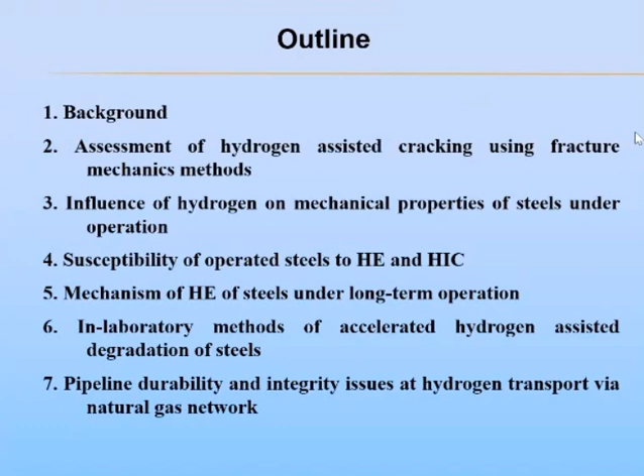After that, I'll consider assessment of hydrogen-assisted cracking using fracture mechanics methods, influence of hydrogen on mechanical properties of steels under operation, susceptibility of operated steels to hydrogen embrittlement and hydrogen-induced cracking, mechanism of hydrogen embrittlement of steels under long-term operation, laboratory methods of accelerated hydrogen-assisted degradation of steels, and finally, pipeline durability and integrity issues at hydrogen transport via natural gas network.

The research questions of the lecture are focused on understanding what hydrogen does when it goes into material, how hydrogen induces damage in steel, and why hydrogen influences the worsening of properties so much.

Hydrogen penetrates the structure of steel and has been responsible for many catastrophes. We know hydrogen goes into material and causes failures, but how it does it, how it induces damage, and how it affects the properties of steel so much are still open questions in science.

It's really difficult to measure individual atoms of hydrogen in steel because it's very light, very small, moves a lot, and hydrogen is highly abundant in the universe. Direct observation of hydrogen in material is very challenging.

Hydrogen in metals has attracted interest from scientists for many decades. Most of the interesting properties are related to the small size of hydrogen, its interstitial diffusion accompanied by quantum mechanics, and the extraordinary high mobility of hydrogen atoms in materials.

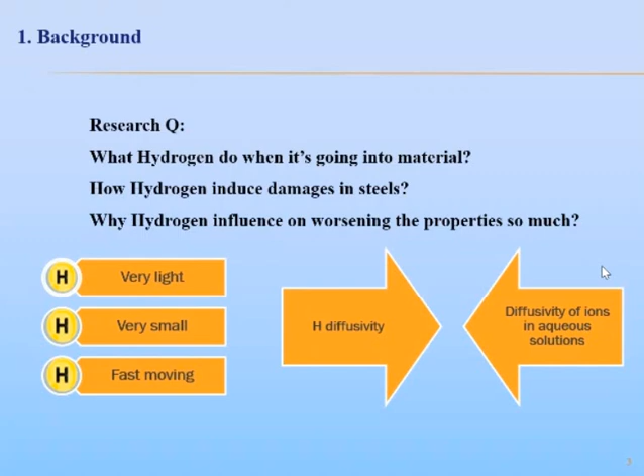Hydrogen-metal interactions can occur at high or low temperature, depending on whether it's below 200 degrees Celsius. Therefore, hydrogen damage takes place in two different regions: elevated temperatures, and temperatures at ambient and slightly above.

This lecture will mainly consider low temperature hydrogen-induced damage.

Once entered the metal, atomic hydrogen interacts with the metal structure and may produce damage of various forms, such as hydrogen embrittlement, hydrogen-induced cracking, blistering, delayed fracture, and others. There are also other damage mechanisms induced by hydrogen in metals.

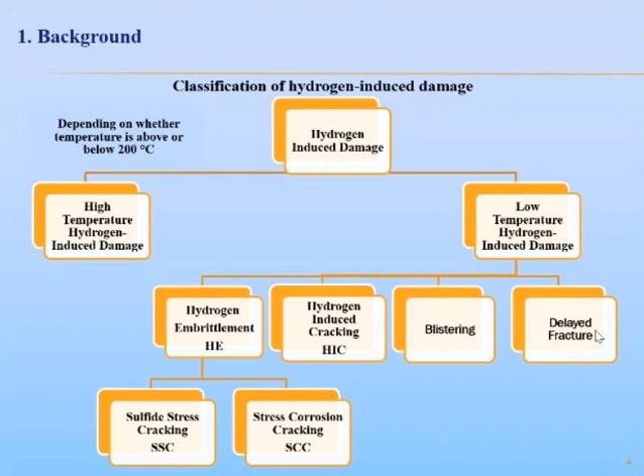If it occurs internally, methane is trapped like hydrogen in hydrogen-induced cracking, creating internal cracks and reducing fracture toughness, fatigue, and creep resistance. This type of damage is often called hydrogen attack.

There are many classifications of hydrogen deterioration, and the most general ones divide embrittlement into two groups: internal and external.

The first relates to embrittlement caused by hydrogen contained in the metal matrix as a result of the manufacturing process. The second is caused by exposure to hydrogen, which inserts inside the metal and modifies the mechanical properties.

Hydrogen can be available in the metal from various sources, including electrochemical reduction of hydrogen, water, carbon dioxide, hydrogen sulfide, and other ions. Here you can see simplified electrochemical reactions for this hydrogen evolution.

In the first stage, the formed hydrogen atom is adsorbed, and it either combines to form hydrogen gas or becomes absorbed into the steel. Here are also presented the most common types of hydrogen sulfide corrosion related to hydrogen damage.

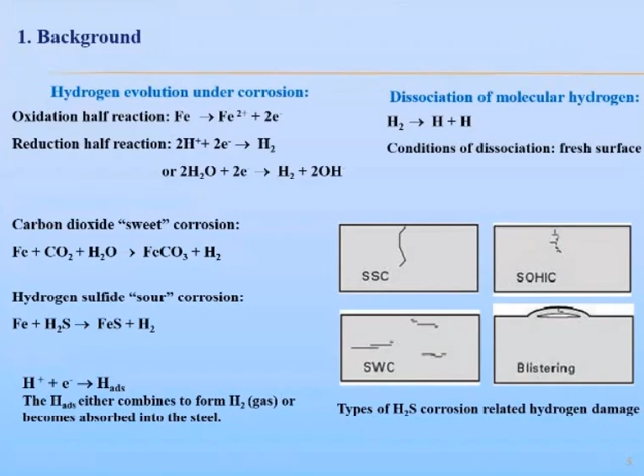Hydrogen can be trapped at various types of lattice defects in steels. Here you can see a nice illustration by Koyama and others showing different hydrogen trapping sites in steels, such as vacancies, certain solutes, grain boundaries, phase interfaces, triple points, precipitates, and others.

The main challenge in identifying the governing mechanism behind hydrogen embrittlement lies in mapping hydrogen trapping and kinetics with microstructural sensitivity.

Microstructure-specific hydrogen mapping is the most important challenge on the way to a better understanding of the underlying hydrogen mechanisms. The presence of hydrogen is challenging to map due to its low mass, huge embrittling effect already at low concentrations, and high diffusivity in the presence of compositional, thermal, and mechanical gradients.

For instance, the average concentration of hydrogen in steels is within the range from 0.1 to 100 ppm. Moreover, hydrogen is diffusible even at room temperature, and this effect is further enhanced in the presence of stress localization.

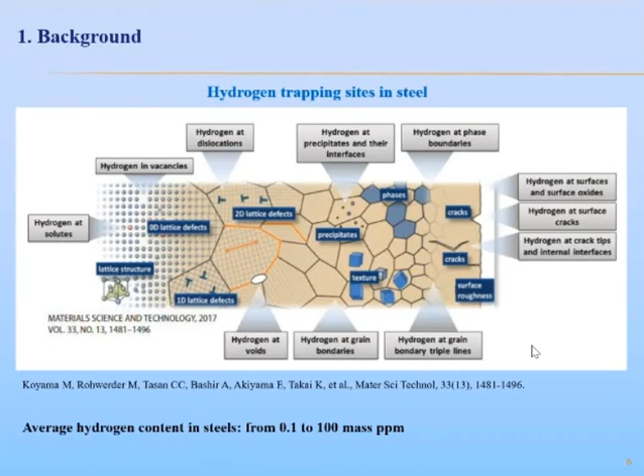There are four requirements for failure due to hydrogen embrittlement: microstructure feature, mechanical properties, exposure to an environment that contains hydrogen or is hydrogenating, the presence of tensile stress on the component, and a temperature range that supports hydrogen transport in steel, which is between -50 to 150 degrees Celsius.

It's worth noting that while cracking mechanisms are similar, the rate controlling processes are very different. A combination of the main mechanisms that occur under hydrogen embrittlement are hydrogen enhanced decohesion and adsorption induced dislocation emission.

Note that high strength steels with tensile stress greater than 1000 megapascal are the alloys most susceptible to hydrogen embrittlement. For a certain hydrogen content, in general steels appear more susceptible as strength resistance increases, and the tendency to embrittlement increases as strain increases. Hydrogen embrittlement decreases as temperature increases, and this behavior prevails at room temperature and disappears above 200 degrees Celsius as dissolved hydrogen escapes out of steel.

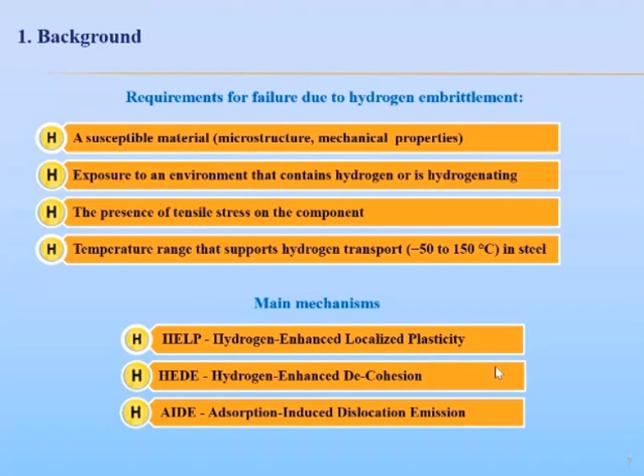The adsorption-induced dislocation emission mechanism is based on hydrogen-induced weakening of interatomic bonds, with crack growth occurring by localized slip. It's assumed that adsorbed hydrogen weakens substrate interatomic bonds and thereby facilitates the emission of dislocations from crack tips. There is also substantial dislocation emission ahead of the crack tip, which results in the formation of voids around particles or at slip band intersections. Such behavior means that crack propagation occurs due to dislocation emission from crack tips, also with a contribution from void formation ahead of the crack tip.

Here you can see how hydrogen is involved in damaging pipeline steels of oil and gas pipelines. Under metal loss from the internal and external surface of the pipe due to electrochemical corrosion, this leads to molecular hydrogen accumulation in certain trapping sites. Such circumstances promote the formation, evolution, and accumulation of micro defects in pipeline steel, or so-called damage accumulation.

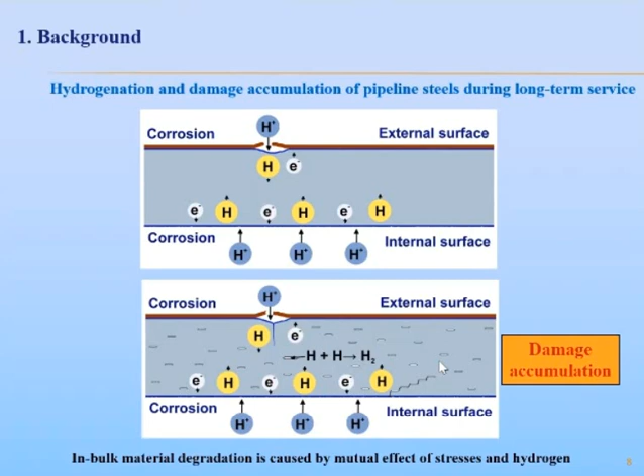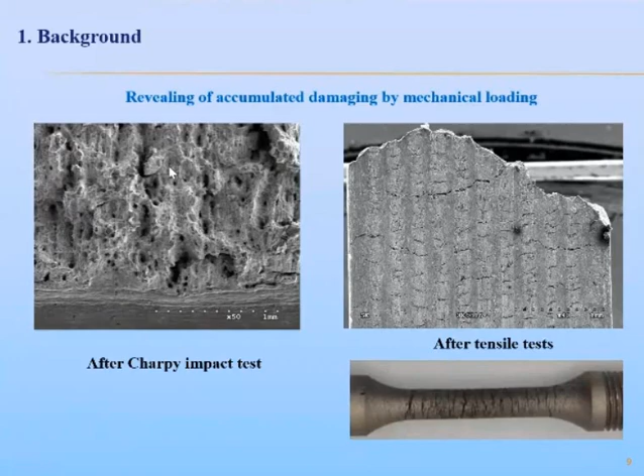Consequently, this leads to deterioration of mechanical properties, especially plasticity and brittle fracture resistance. Therefore, corrosion in oil and gas pipelines is a key issue in safe operations because it accelerates bulk material degradation due to a destructive role of hydrogen, and steel hydrogenation together with working stresses facilitates the development of bulk damage at nano and micro scales. Here you can see some examples of revealing such damage under mechanical loading.

For rolled steels, delamination is a typical feature for degraded metal. Hydrogen facilitates decohesion, so it intensifies microdamaging. It is interesting to look at the mechanism of fracture and energy consumption of fracture in areas between these decohesion elements. If a fracture is ductile with more energy consumption, then fracture occurs due to micro-void coalescence, and the role of hydrogen can consist in formation of high pressure in voids.

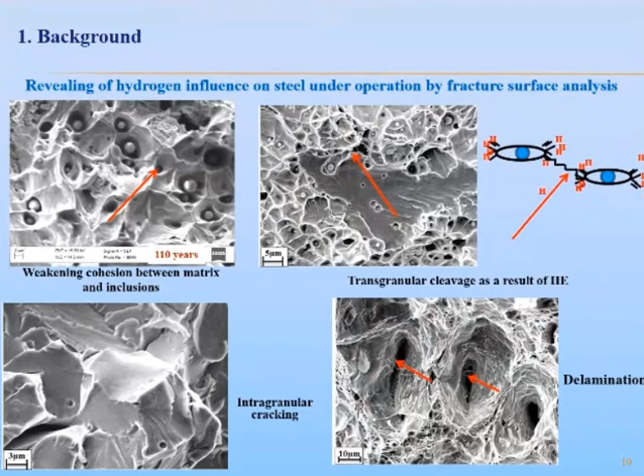Assessment of hydrogen-assisted cracking using fracture mechanics methods. Generally, two types of mechanical loading are used: static and cyclic. For the first one, the crack growth rate dependence on stress intensity factor and a threshold stress intensity factor characterize fracture resistance. In the second one, a corresponding dependence of fatigue crack growth rate on delta K and fatigue threshold delta K-TH, with a constant level of crack growth rate in a wide range of stress intensity factor.

Regarding fatigue crack growth rate, corrosive and hydrogenating environments influence the curves, changing what's typical for tests in air, in these diagrams. They can decrease or increase a fatigue threshold, considering the middle part of the diagram, not influence, or accelerate fatigue crack growth. If the middle part of the curve is similar to a plateau, it means realization of a stress corrosion cracking mechanism in conditions of fatigue.

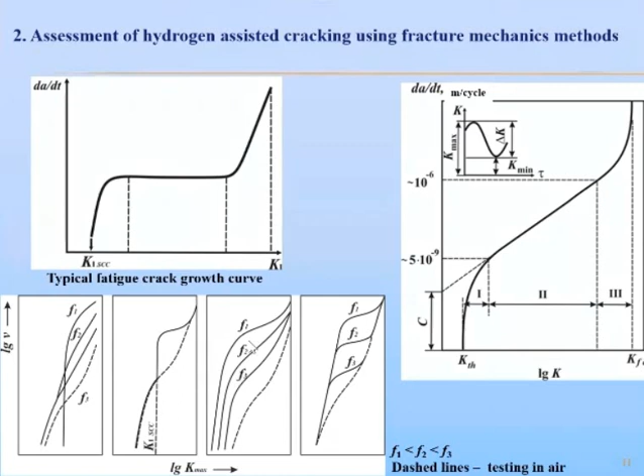Stress corrosion fatigue, and different frequency causes different plateau curves.

Corrosion and hydrogenating environments can change mechanical situation, which usually is not detected by nominal stress intensity factor, a value calculated on the basis of specimen geometry, scheme, level of loading, and crack length. In this case, possible crack branching (micro, macro, intergranular, etc.) and blunting are not taken into account.

But they can have some effect for starting cyclic loading. Another factor that should be taken into account is the crack closure effect, which concerns fatigue crack growth only and consists in prevention of crack closure during part of unloading. The real stress intensity factor range is less than the nominally calculated one. The effective stress intensity factor range is the real mechanical driving force of fatigue crack growth.

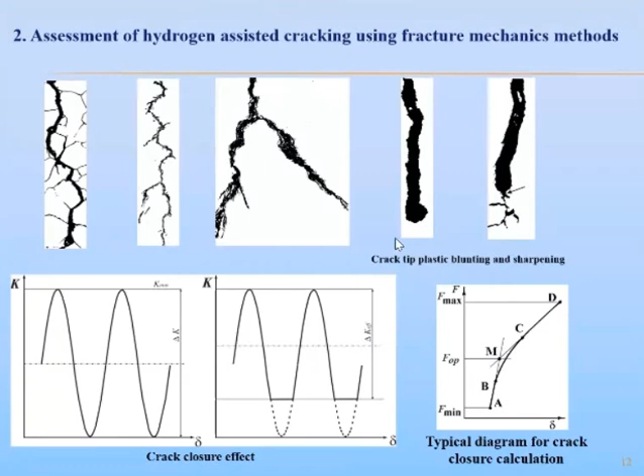Influence of hydrogen on mechanical properties of steels under operation. There are many types of mechanical damage and failure associated with the presence of hydrogen in metal.

Hydrogen in steel may decrease ductility, embrittlement, blistering, and cracking that occurs at lower loads than measured in the absence of hydrogen. Hydrogen accumulates in areas of high stress and may reach a critical concentration, potentially causing fractures and catastrophic damage. Hydrogen atoms readily diffuse in the metal lattice and pose a serious threat to mechanical strength and ductility.

Influence of hydrogen on mechanical properties of steels under operation can be evidenced by mechanical testing of material samples extracted from the operated structure. Here, the presented scheme demonstrates degradation of low carbon and low alloyed pipeline steels. The first stage is deformation aging, and the second is damage accumulation.

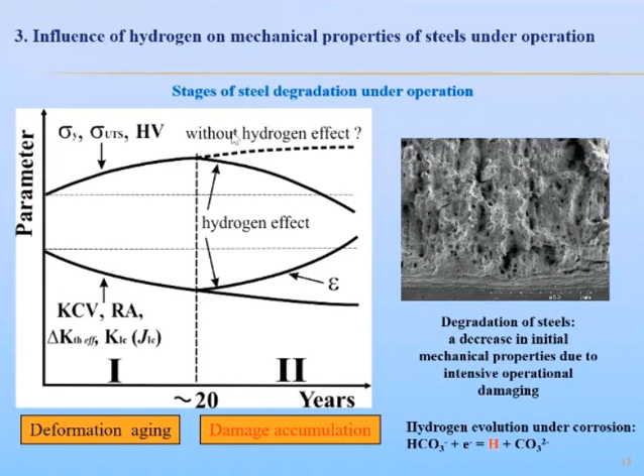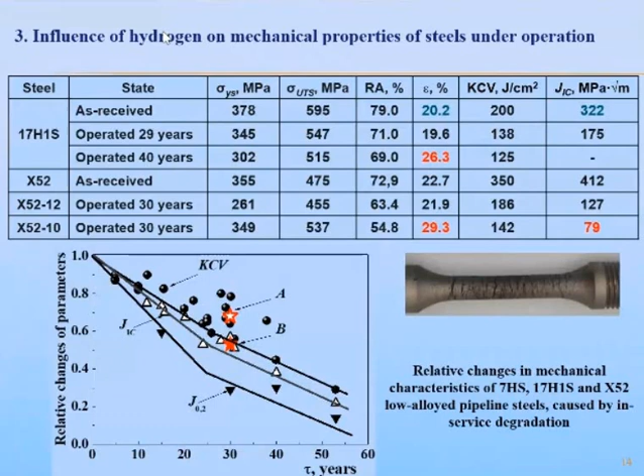Here presented are mechanical properties of pipeline steels in the as-received state and after operation. As we can see, the main peculiarity of operational hydrogen-assisted degradation of steels consists in a decrease of plasticity and brittle fracture resistance. Regarding the characteristics of plasticity, special attention should be paid to assessing elongation.

The issue is the following: operation, due to a long-term mutual effect of hydrogen and working stresses, causes development of microdamaging in steel, and under tension, elongation will combine real plastic deformation with multi-crack opening.

It will at least not diminish elongation, or even increase it. On the slide, you can see that steel operated for 30 years is characterized by the least value of fracture toughness but the highest value of elongation.

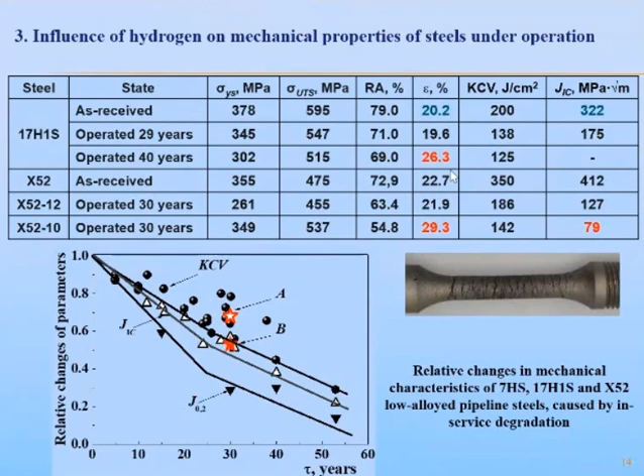Hardness of the damaged steel is also lower than that of the as-received steel. Intensification of the damage in steels can be evidenced by behavior assessed through hydrogen extraction and permeation methods, which provide valuable information for assessment of the degree of in-service dissipated damaging.

The hydrogen permeation method of Devanathan-Stachurski is used, taking into account that hydrogen in a metal is located mainly in defects, which are considered hydrogen traps. Using this method, the lattice and apparent hydrogen diffusion coefficients can be determined, and their ratio is a measure of the trapping efficiency.

Here you can see that the operated steel is distinguished by higher trapping. It means a high level of micro damaging.

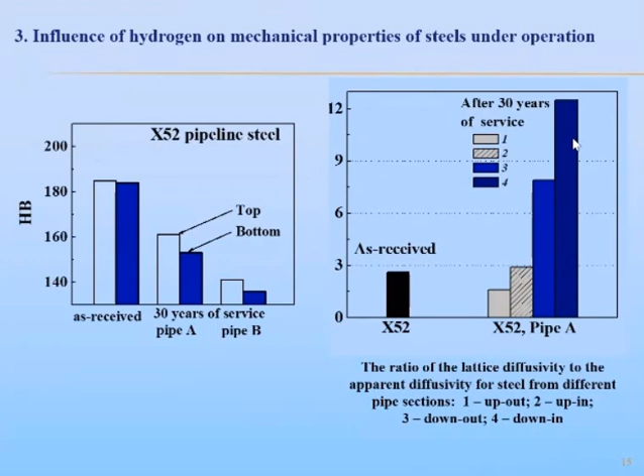Using the hydrogen extraction method, it was found that in the case of steels in the initial state, most hydrogen was dissolved at a low extraction temperature, 200 degrees Celsius, whereas the operated steel is characterized by a higher temperature of desorption, indicating hydrogen trapping by sites with higher energy.

It's important to emphasize that it's not really the hydrogen concentration that causes embrittlement, but rather hydrogen diffusivity through the steel.

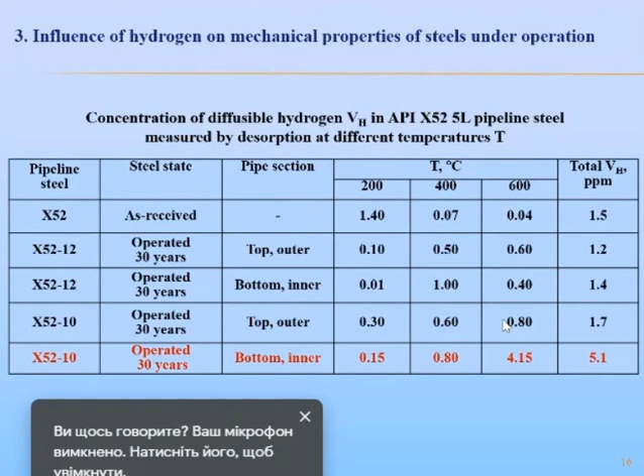As you can see on this slide, a decrease in brittle fracture resistance is in good agreement with hydrogen concentration in the metal. Higher hydrogen concentration corresponds to a lower level of impact toughness.

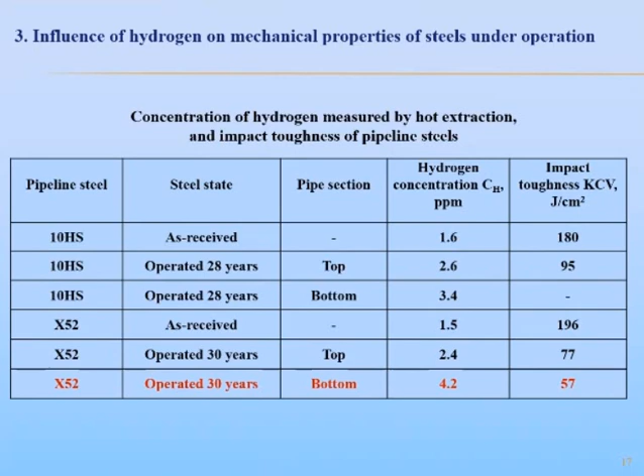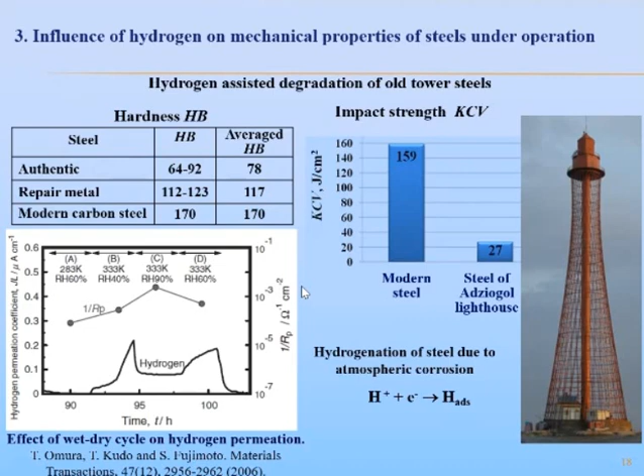Here you can see another example of hydrogen-assisted degradation of carbon steel under operation and dependence of steel degradation degree on the sign of operational cyclic loading. The material under study was low carbon steel obtained from a stacker conveyor boom after 30 years of service. This boom frame of a stacker conveyor was subjected to atmospheric corrosion and operation, and as it was shown, atmospheric corrosion is accompanied by hydrogenation.

So here presented data show relative changes in mechanical properties of the carbon steel in different states. A minor change in strength characteristics of operated steel compared with the reference steel was observed. A reduction in area and elongation at fracture were decreased as a result of a long-term operation. As can be seen from these results, both tensile and compressive cyclic loading and the operation leads to plasticity deterioration.

Here is the result of degradation of brittle fracture resistance of the steel. Thus, at ambient temperature, the impact toughness values of the operated steels were about 30% lower than the reference steel. And the extremely low values of impact toughness were obtained at testing at temperature of minus 40 and minus 20 degrees Celsius for all operated steels. As you can see, the decrease in impact strength of steel due to long-term operation was almost the same for both studied operated steels, irrespective of the sign of operating stress.

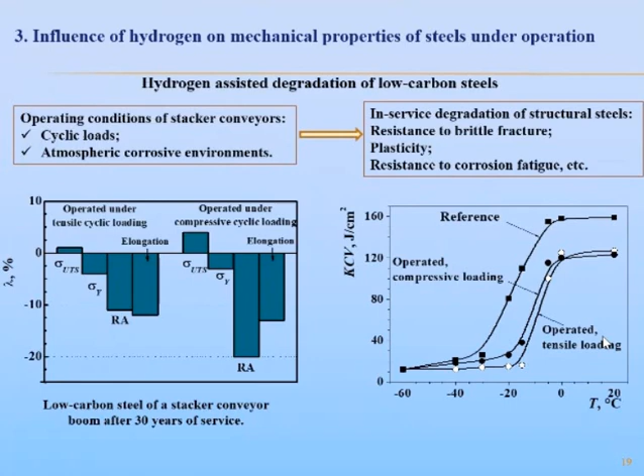On this slide, results on fatigue crack growth propagation in the operated under tensile loading steel and in the as-received and reference steel, in air and in a corrosive environment at different stress ratio. It should be noted that a high plasticity of the study steel and thin thickness of the specimens, limited by angle bar thickness, and high stress ratio significantly limited the stress intensity factor range for which it was possible to obtain fatigue growth values and build the kinetic diagrams.

As can be seen from this data, these values of stress intensity, of minimum thickness of specimens to ensure plane strain state, are in the near threshold region of the fatigue growth curves. Therefore, only the threshold stress intensity factor range can be considered as characteristics of the steel. And the difference in fatigue growth rate revealed for different stress ratio are associated mainly with a decreasing effect of fatigue crack closure effect at increasing stress ratio.

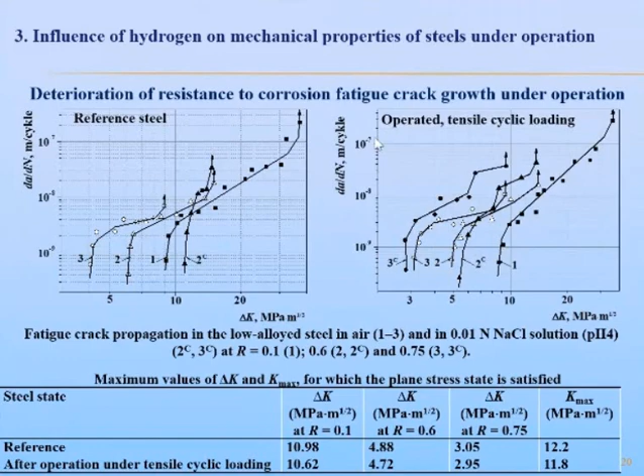Here you can see another example showing deterioration of resistance to corrosion fatigue crack growth under operation. And cathodic polarization of steel in corrosive environment causing its hydrogen charging leads to an increase in fatigue crack growth rate more intensively for operated damaged steel in the medium amplitude region of loading, the Paris region, often with a plateau of rate on the curve. This is due to a combination of mechanisms of fatigue and stress corrosion cracking.

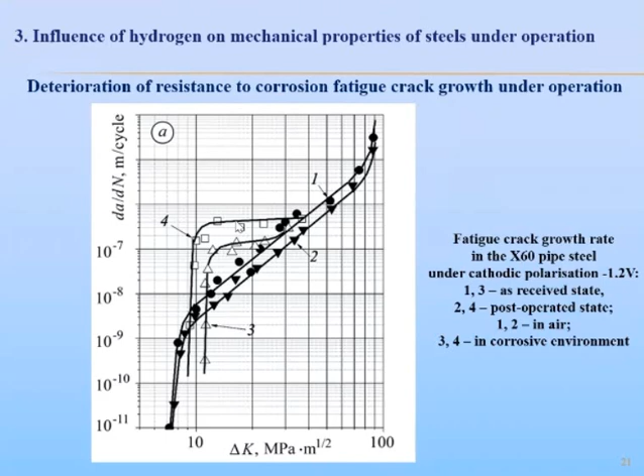It means that fatigue growth is significantly induced by sustained load. And here is demonstrated effect of internal hydrogen on fatigue growth in the operated pipeline steel, when hydrogen diffuses to a prefracture zone through the bulk metal.

Fatigue growth in steels is usually studied under conditions of filling the crack cavity by a hydrogenated environment. However, in this case, to study the effect of internal hydrogen, a special scheme of fatigue testing and hydrogen electrochemical charging has been developed.

As you can see, only the lower part of the specimen was subjected to electrolytical hydrogenation, while at the same time the upper part of the specimen had a growing fatigue crack. The fatigue crack was in air, and hydrogen absorbed by the metal due to electrolytical hydrogenation moves by diffusion to the crack tip and affects crack growth rate.

This figure demonstrates such an effect. We can see acceleration of fatigue growth in the operated pipeline steel caused by internal hydrogen.

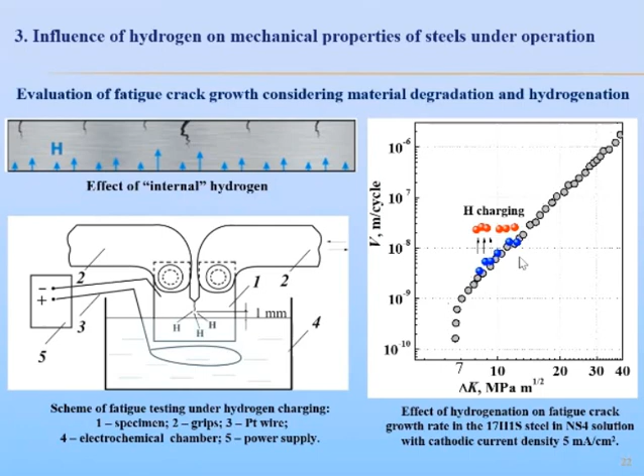Susceptibility of steels to hydrogen embrittlement can be studied by tension testing of specimens in air after hydrogen precharging electrolytically. The plasticity characteristics of steels without and after hydrogenation are compared, and susceptibility to hydrogen embrittlement can be evaluated by the change in plasticity characteristics. The research results demonstrated that both studied steels of casing pipes were sensitive to hydrogen embrittlement.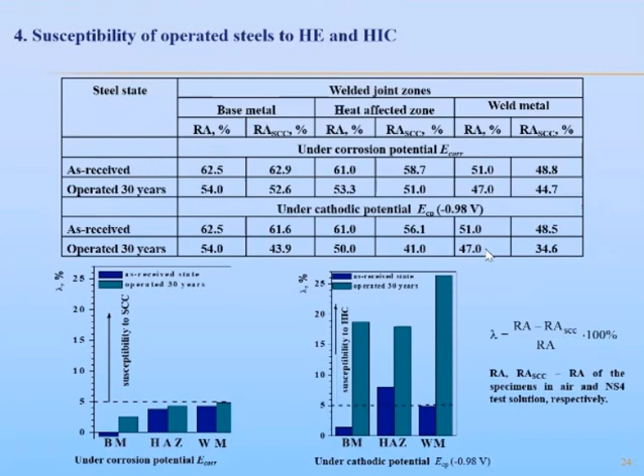In order to assess susceptibility to hydrogen-induced cracking, the electrochemical method of hydrogen permeation can also be used. For this purpose, an electrochemical permeation cell with a cathode and anode is used, and a steel membrane specimen is located between the chambers.

In the cathode chamber, cathodic current is applied to the hydrogen input side of the metal membrane, and it's periodically increased step by step. On the hydrogen output side, hydrogen permeated through the membrane is oxidized, and increasing cathodic current each time leads to an increment of anodic current density in the oxidizing cell.

The layer of the membrane becomes damaged due to combined action of hydrogen and residual stresses induced by intensive hydrogen charging. In such a case, a sharp decline appears on the oxidizing curve of the hydrogen output side of the membrane, and this indicates the trapping of hydrogen by newly formed defects, that is, the development of hydrogen-induced damage.

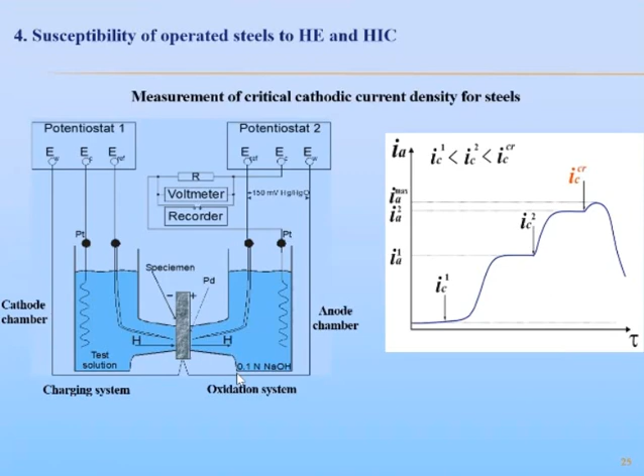Thus, the cathodic current density which corresponds to defect occurrence is considered critical, and it shows the mechanical susceptibility to hydrogen-induced cracking. As can be seen, the initial state in comparison with the operated steel is characterized by a higher level of critical cathodic current, meaning it is more resistant to hydrogen-induced cracking.

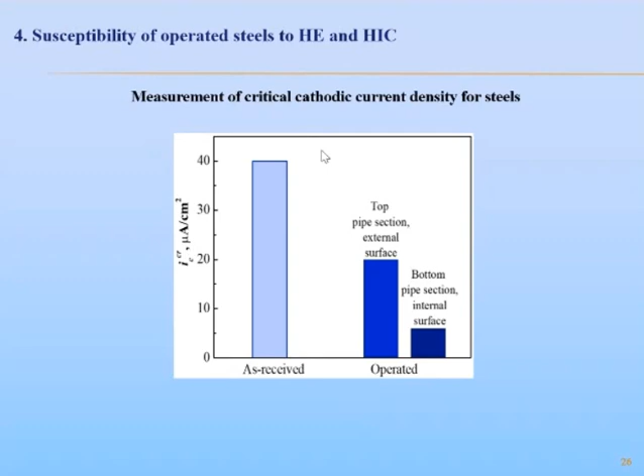Rolled steels are commonly susceptible to delamination cracking, since they are characterized by a banding microstructure, and non-metallic inclusions are also elongated in the rolling direction. Here you can see typical microstructures of rolled pipeline steels. Generally, the lamination is formed along a plane with relatively weaker texture parallel to the rolling plane within the steel due to any factor that leads to anisotropic microstructure, including plastic deformation and so on.

Damage also accumulates in the rolling direction during long-term operation, facilitating cracking along the pipe axis. Hydrogen charging of the metal from inside the pipe due to electrochemical corrosion leads to molecular hydrogen accumulation at certain trapping sites, for instance intergranular defects and the inclusion matrix, creating high pressure in them. Hydrogen accumulated inside the delamination cavity eventually leads to pipeline damage, and as a result of excessive hydrogen pressure, fracture often takes place even in the absence of any external loading.

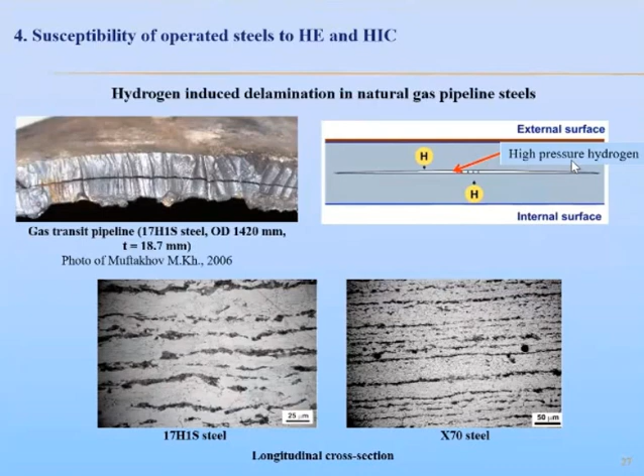A common feature of delamination cracking in pipelines is that fracture propagates in a longitudinal direction, which often results in pipeline fracture. Here you can see extensive delamination of the pipe wall in two natural gas pipe elbows operated for 40 years, revealed by ultrasonic testing of the pipe wall. Such delamination covers a large area in the tension part of the pipe elbows, and in one of them, a crack was also revealed.

Formation of this crack results from the pressure of recombined hydrogen accumulated in the delamination.

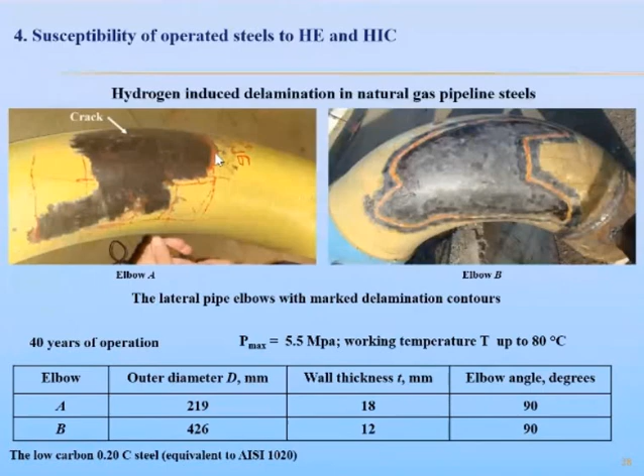And it was confirmed by the fact that the crack growing from the macro defect opened on the outside of the pipe at some distance from the delamination contour.

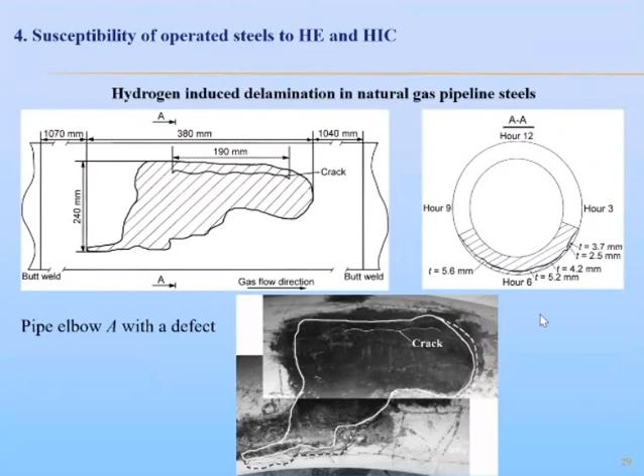Here you can see results of laboratory testing of mechanical properties of this steel, performed using standard smooth cylindrical specimens and also notched specimens in order to estimate mechanical properties.

Axial and cross transversal specimens were tested. The pipe elbow steel was characterized by lower plasticity in comparison with the straight pipe run, regardless of whether the elbow section was tensioned or compressed.

Moreover, the highest decrease in reduction in area values was inherent to the steel of the tensioned pipe elbow section compared to the straight pipe one.

It should be noted that to determine correctly the plasticity characteristics of pipeline steel susceptible to hydrogen-induced cracking, notched specimens with stress concentration in the cross-section location only should be used.

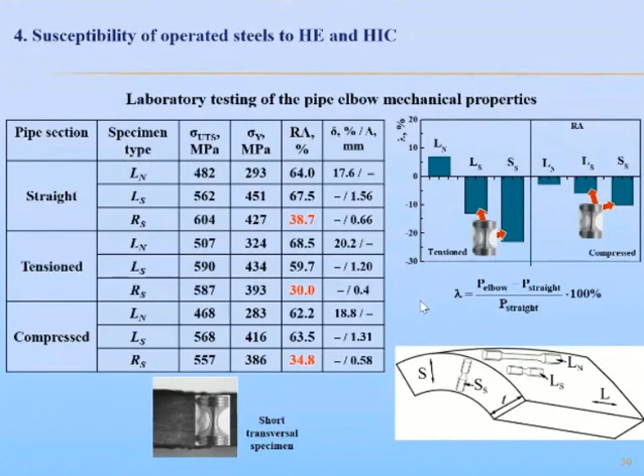Here, presented data show susceptibility of the steel of straight and tensioned pipe sections to hydrogen embrittlement. It's obvious that the steel of the tensioned pipe section was characterized by higher sensitivity to hydrogen embrittlement, especially under testing short transversal specimens, in which a fracture plane is parallel to the most damaged plane.

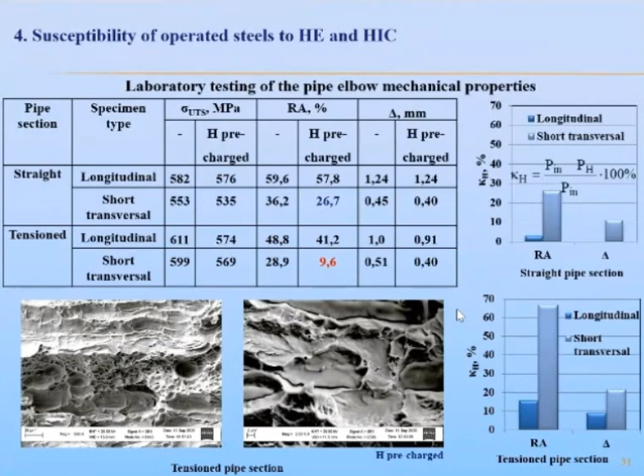The steel of the tensioned pipe section, being the most degraded during operation, was characterized by lower values of fracture toughness, and also very low values of impact toughness were obtained under testing short transversal specimens.

It should also be noted that when longitudinal specimens were tested, a number of delaminations on the fracture surface were observed. Here you can see on my...

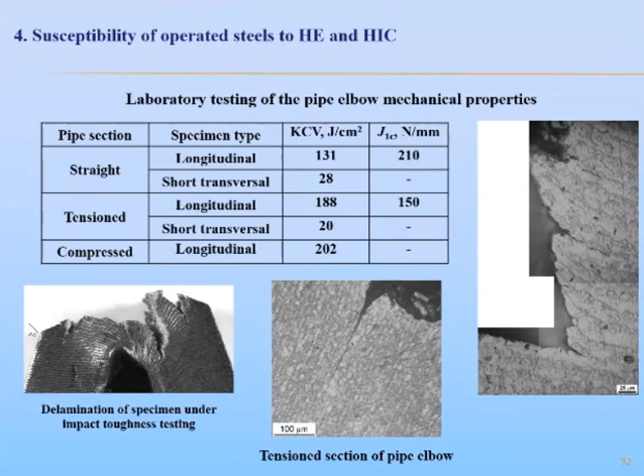Another case of the extensive delamination of pipe steel was detected on two sections of the above ground natural gas transit pipeline crossing a river.

So two cases were revealed. The first one: only the upper part of the above ground pipe was characterized by delamination, almost from one butt weld to another. Another example of a full delamination between two butt welds was observed.

And the reason for this is that high pressure hydrogen is located between these layers, causing fracture.

There is a common feature for all considered cases: the pipes were above ground. It means that they were subjected to climatic temperature changes, and therefore there were conditions for moisture condensation on the pipe internal surface. As was shown earlier, condensed water serves as a source of hydrogenation due to corrosion, and thus hydrogenation of pipe steel from the internal surface is possible.

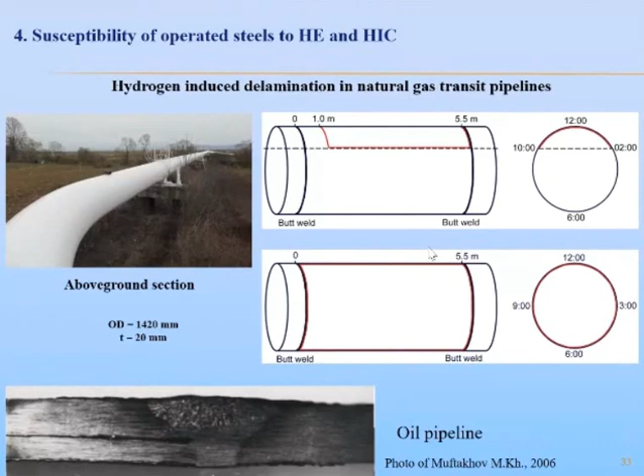So, a mechanism of hydrogen embrittlement of steels under long-term operation. The embrittlement of pipe is a well-known phenomenon, but the precise role of hydrogen in this process is not well understood. Here a new model is proposed wherein hydrogen facilitates carbon diffusion in ferrite-pearlite pipeline steels under operation, which leads to carbide enrichment, both at grain boundaries and intragranular defects, thus promoting cleavage fracture.

So the background is as follows. Changes in microstructure of long-operated pipeline steels of gas transit pipelines were observed experimentally as precipitation of carbides at the grain boundaries, as reported by Chuvil'deev, and the presence of carbides at grain boundaries affects stress corrosion cracking resistance of pipeline steels under operation.

It was suggested by Nechaev that during long-term operation of steels, carbide-like and other nanosegregated structures are formed at grain boundaries. According to his calculations, for formation of the carbide at grain boundaries, it's enough for carbon to diffuse from the grain body to the boundaries at a distance of only 1 micron, during, of course, a long term of 10, 20 years of operation of gas pipelines.

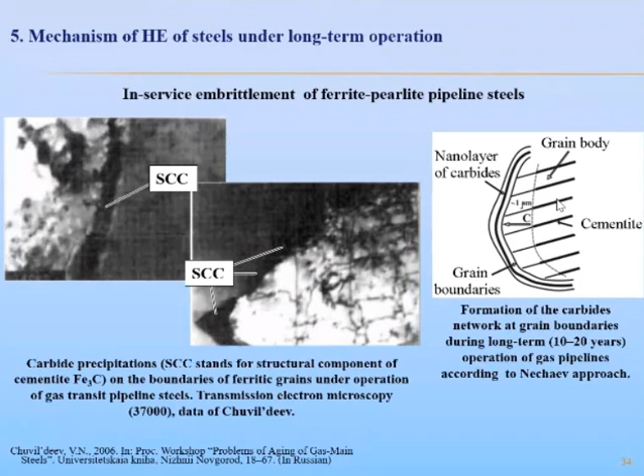This phenomenon is associated with maintenance of pipeline steels under operation. It was assumed that diffusion of carbon not only to grain boundaries but also to various defects inside grains, boundaries of subgrains, or other defects took place during long-term operation, and it led to formation of nanoparticles of carbides at these sites also.

Under service conditions, diffusion of carbon can be significantly intensified by hydrogen being absorbed by steel. It's well known that hydrogen intensifies diffusion of other elements in steel, including carbon. And precipitation of carbide nanoparticles causes steel embrittlement and consequently leads to brittle fracture and reduction in fracture energy.

In such circumstances, both intergranular cracking of pipe steel under surface and transgranular cracking of post-operated steels under impact toughness testing are associated with this phenomenon. Under such a mechanism of in-service degradation of metal, the fracture surface should be enriched by carbon compounds of carbide type, and as is known, electrochemical characteristics should be sensitive to this enrichment.

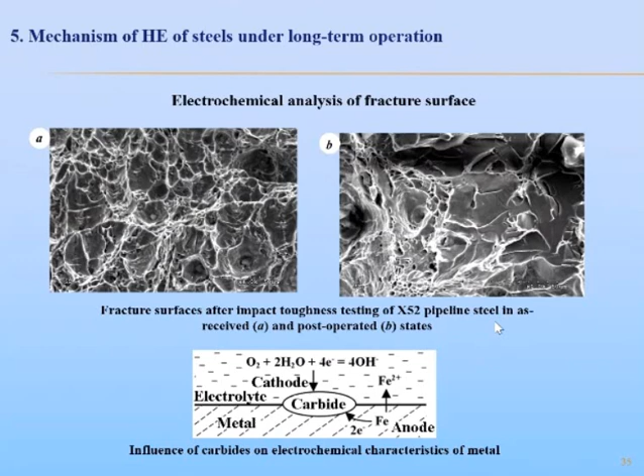Here we can see a dependence between electrode potential and carbon content in steel. It confirms a known general trend of a negative shifting of potential with increase in carbon content in carbon steel.

Also presented are results of electrochemical experiments performed on the fracture surface of specimens from X52 pipeline steel in different states, being fractured after impact toughness testing with brittle fracture, and on the polished surface. A significant difference between potentials measured on polished and fracture surface for post-operated steels was revealed.

These steels were operated for about 30 years, and the potential was decreasing. According to the presented data, the steel with the highest degradation degree was characterized by the most negative shift of potential compared with the as-received state.

Such a significant difference in the potentials can be explained by the fact that the fracture surface is the result of propagation of local sites characterized by minimal resistance of material in fracture. Therefore, changes in the metal initiated during long-term operation that caused mechanical properties degradation are most distinguishable on the specimen fracture surface.

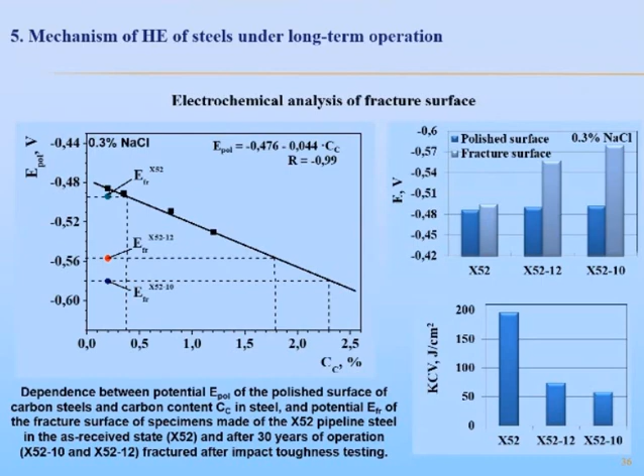In laboratory methods of accelerated hydrogen-assisted degradation of steels, development of such accelerated methods is very important since they allow predicting changes in mechanical and other properties of structural components during their service, or at least comparing different materials regarding the stability of their properties during service.

Such methods are applicable not only for hydrogen assisted degradation of steels, but will also be useful for operated materials, since they will be able to assess susceptibility to degradation under further service. The question is how to simulate changes in material in laboratory conditions similar to real degradation.

From this lecture, you have already known that operational in-bulk material damaging is the most dangerous for structural integrity. So we will try to simulate a development of damaging in laboratory conditions.

Here it should be mentioned the existing method of in-laboratory deformation aging of structural steels, which consists in axial loading up to strain value of 10% and artificial aging at 250 Celsius for 1 hour. Such a procedure provides deformation aging due to formation of Cottrell clouds which block mobility of dislocations.

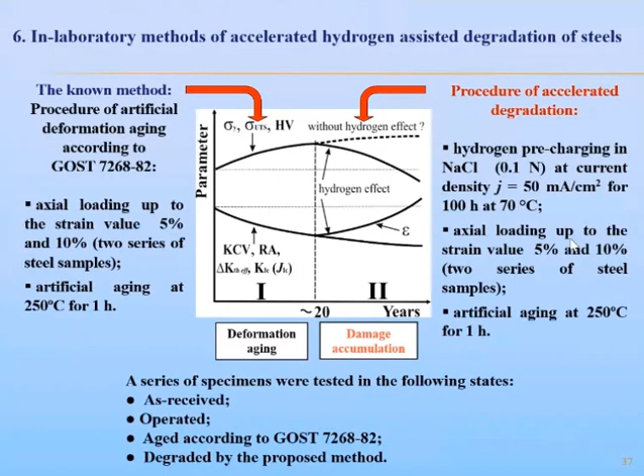This can be achieved by preliminary hydrogenation of specimens, and only after that, loading to a certain value and then artificial aging. A simultaneous action of hydrogen absorbed by metal and deformation will cause micro damaging in the metal.

So it's obvious that there is conformity to the real steel state after operation.

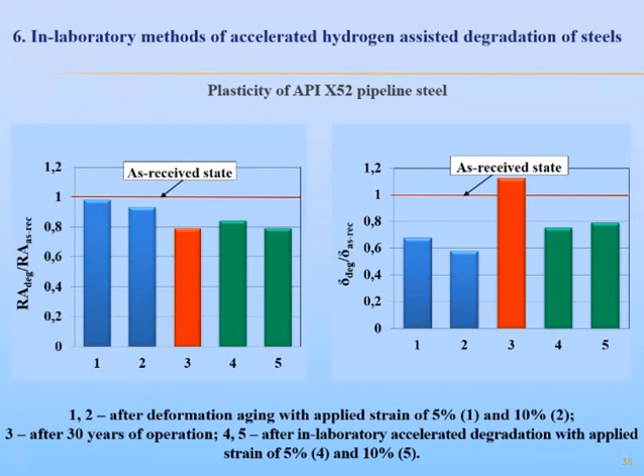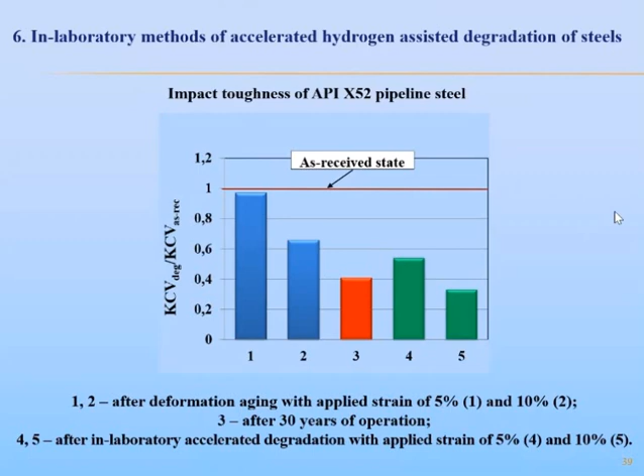Pipeline integrity issues at hydrogen transport via natural gas network.

Hydrogen will play a significant role in a decarbonized energy system in the coming decades, and it can be transported long distances by pipelines. Accordingly, it's advisable to consider not only the possibility of transporting hydrogen by pipelines specially built for this purpose, but also using the existing network of gas pipelines.

At the same time, the problem of violation of steel pipe integrity due to the well-known negative impact of hydrogen on the mechanical properties of steels should be considered. One of the most important issues is hydrogen embrittlement, as well as decrease of resistance to brittle fracture, because it's often responsible for unpredictable low energy fracture of metal components.

So Ukraine has the experience with transit pipelines, and they have not been used currently to full capacity due to a significant reduction in gas transit. And the future process of decarbonization will only force this situation. According to the European hydrogen backbone vision, one of the steps of extension of hydrogen transport infrastructure can be a repurposing of existing gas infrastructure. Ukrainian gas pipelines can be served as a transit route for hydrogen from Ukraine and Southeast Europe to other European Union countries.

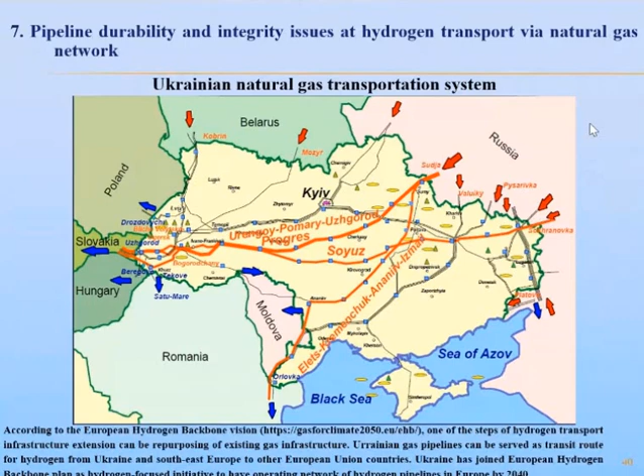However, long-term service of gas pipelines still causes degradation, and evidently hydrogen plays an important role in this. Possible hydrogenation of pipe steel due to hydrogen transportation can cause or intensify hydrogen embrittlement and hydrogen-induced cracking. On this slide, you can see an example of stress corrosion cracking of a pipe from its external surface. However, if a pipe hydrogenates from the internal surface and that hydrogen moves to the opposite wall side, it can also cause embrittlement, resulting in hydrogen cracking rather than stress corrosion cracking.

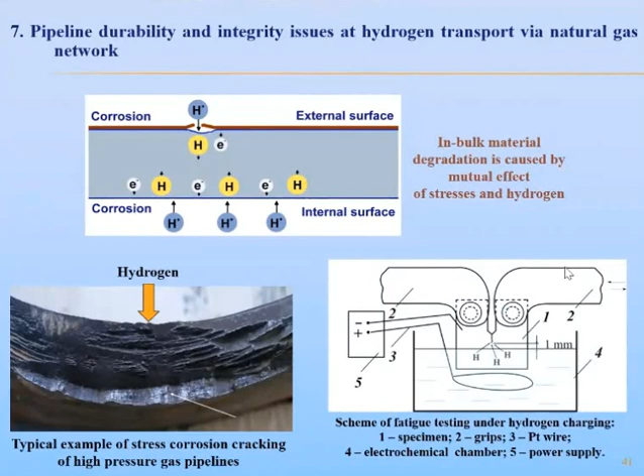It should be taken into consideration that there are at least two mechanisms of hydrogenation. The first consists in electrochemical interaction of the metal surface with condensed moisture, with evolution of hydrogen. This medium inside the pipe contains at least bicarbonate ions, and therefore transported natural gas, due to a certain degree of its humidity, can also be considered aggressive, not only because of corrosion of the inner surface of the pipe but also hydrogenation of the pipe steel.

It should also be noted that only part of the hydrogen atoms generated by corrosion can be absorbed by the metal. Therefore, most of them in molecular form remain in the transported environment. Gaseous hydrogen is another source of hydrogenation. Molecular hydrogen should first dissociate to atomic state, and only then can it be absorbed by the metal.

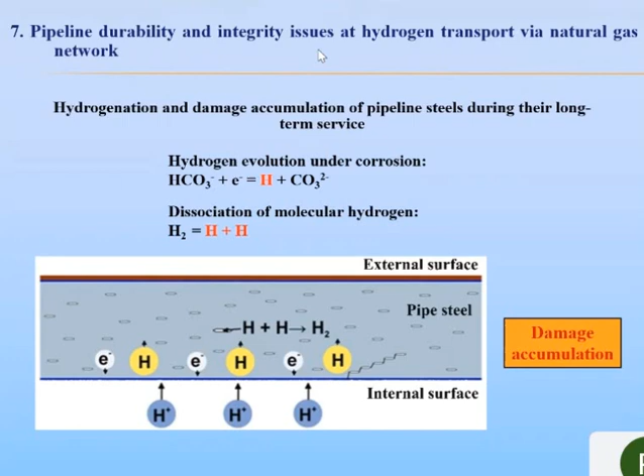We have developed a special methodology for studying the possible effect of interaction on pipeline steel properties due to hydrogen transportation by gas pipelines. The main peculiarity consists in long-term holding of a specimen in a pipe with hydrogen or hydrogen-natural gas mixture, and preloaded specimens will be exposed to hydrogen from 3 months to 3 years in the field, followed by laboratory testing.

For prevention of hydrogen desorption when transporting specimens from the field to a laboratory, they will be held in liquid nitrogen. You can see the assembled stand with two pipes enabling samples in hydrogen or a natural gas-hydrogen mixture at a certain pressure, under conditions similar to those inherent to the above-ground part of natural gas pipelines.

They are subject to climatic temperature changes, and the main task of such a study is revealing specimen hydrogenation and also its effect on mechanical characteristics, especially brittle fracture resistance and hydrogen embrittlement.

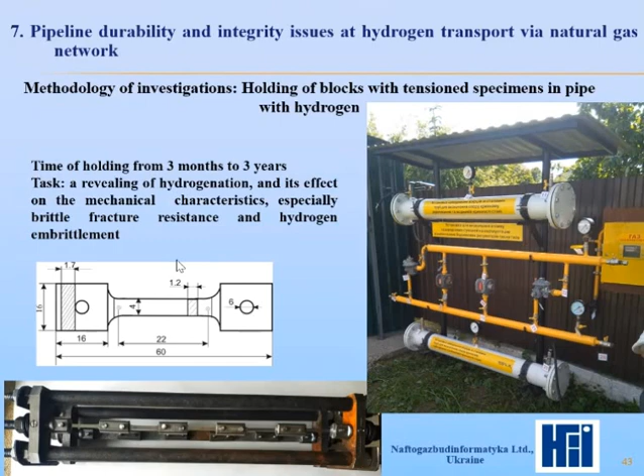That brings me to the end of the presentation, and thanks so much for your attention and listening.